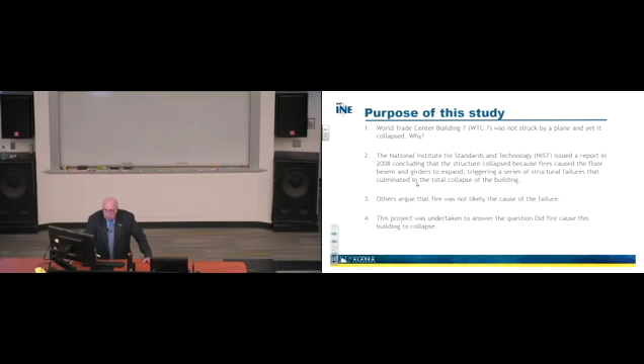More importantly, since this is a progress report, it's not a traditional slideshow with just bullet points. There's quite a bit of prose here, and the idea is that this will be made available for you to read additional information if you choose. We're going to be transparent. We welcome any questions, and we're making everything we've done available so that it's scientifically tested. We'll have a peer review committee to make sure we've met all those standards.

Today I want to share the methodology with us. We first assembled the available documents, construction drawings, etc. that were available for this project and building. Traditionally, I would have liked the opportunity to go in and pick up all the pieces of the puzzle and put it back together like a typical airplane, but they did not exist—it wasn't available.

So we've done the best we can with all the available documents. Basically, we created an AutoCAD drawing that we used to build a virtual geometry of this 47-story building. In digital form, you should be able to see every piece, every puzzle, every member, and it should look exactly like what was used in that structure. That's what we did.

We then prepared an Abaqus nonlinear computer model for the connections and framing of this building. That's a fairly sophisticated finite element program available that enables you to look in detail at how something responds under a set of conditions. I know I have a mixed audience here, so I'll try to keep it as simple as I can, while still sharing some pieces of complexity so those in the technical arena can appreciate that we looked at this in a fairly sophisticated way.

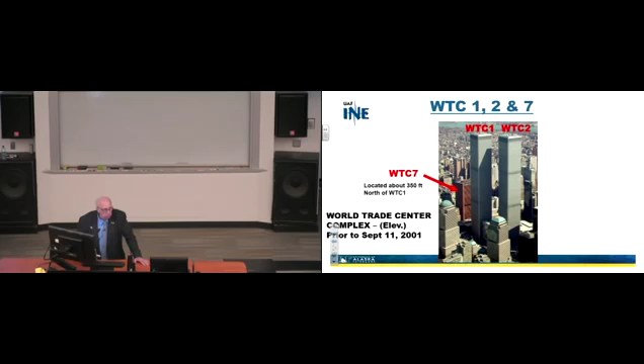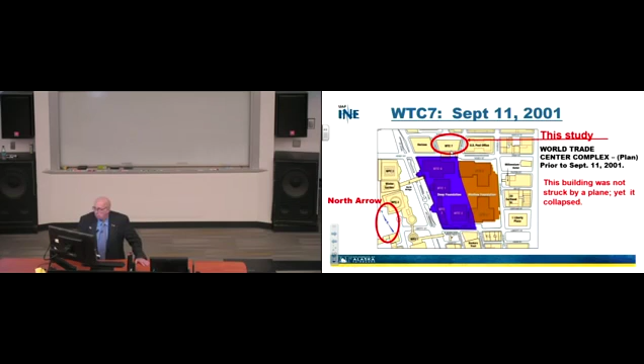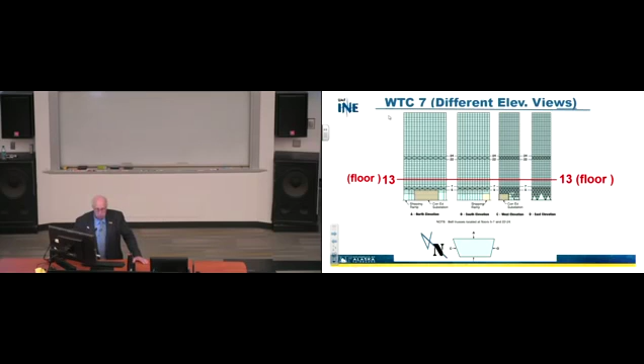So our life in plan view is going to be in that area, because column 79 - just to give you a snapshot of where we're heading - it basically is what they said failed to bring this building down. So we're going to go there and take a look at it, and we're going to look at it intensively.

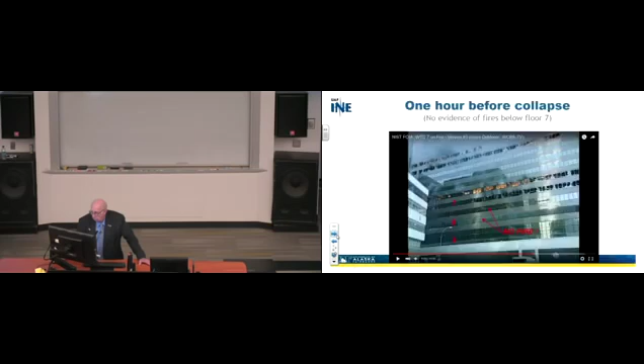The beams didn't get that hot. When we take a look at the beams, they reach 500 degrees C, and the column temperatures only reach 300 degrees C. Now that's significant, because there's a point in time where the steel begins to decrease in strength and modulus decreases when you reach a certain elevated temperature. So the first thing I would have thought about when I got involved here is, okay, the columns obviously got really, really hot, and they lost strength, and we would have ended up losing the building.

Nobody seems to think that ever happened. Furthermore, there weren't a lot of combustibles in there. So no east exterior wall deformation occurred due to expansion of beams. That's their assumption, in beams K3004, C3004, and so forth.

All right, so now moving on with that idea in mind. We've got all that beautiful thing captured in our minds. We're ready to go. So, there were no shear studs installed on the building girders.

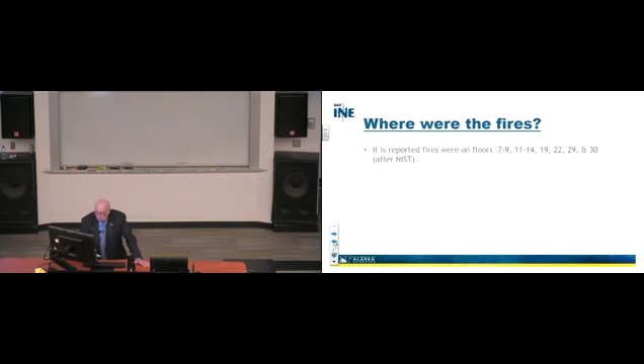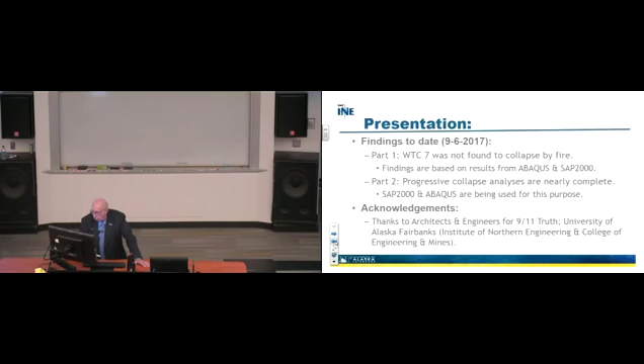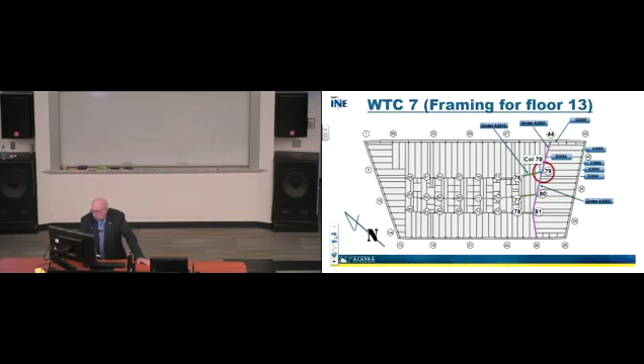Going backwards here or something. Hang on a second, I'm going crazy. Too much fun. All right.

So they've lost those supports. So that means those two columns no longer have lateral support at that level, and did they possibly have a problem later? The floor loading was 88 pounds per square foot. The NIST computer model results were based on exterior columns being fixed in every direction. That's kind of a significant thought.

All right, so now looking at their plans, this came out of the NIST report on page 343, 2008. And so this gives you a geometry of - that's a 44-foot length from 44 to 79. That's a girder length, 44 foot - that's longer than this, for sure. You see what I'm saying? That's not small. This is a huge building, 600 feet across. I mean, for God's sake.

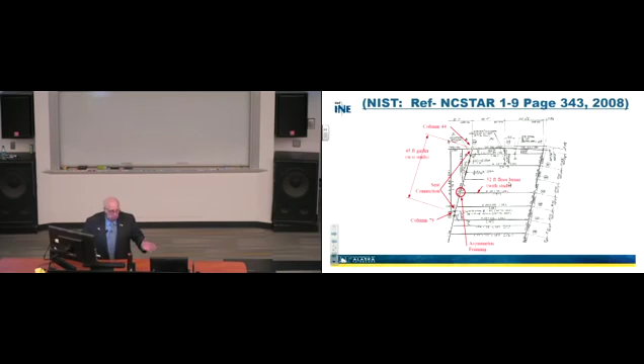So here is, 50-some feet here, 54 feet across. This is our exterior wall. I'm in the northeast corner of this building. Is that clear to everybody? Here we are in that trapezoid world. Notice that there's asymmetric framing. These beams, those beams, for God's sake, are 52 feet long. That's not small. I mean, where in the world do you see that kind of stuff?

So anyway, in their view, by taking a heat model, putting fire on it and then subjecting their finite element model to an increase in temperature, they got a thermal expansion. Their thermal expansion looks like this - so that actually is this girder right here, A2001. It expanded, and they said it pushed off of this seat, bearing seat, and thereby they lost support. And then these cascaded downward.

Okay, so that's basically what we're talking about here. There's that girder I'm talking about, there's that exterior, and here are lateral supports for this beam system through here. So what were their conclusions?

First of all, their fire-induced weakening of critical columns did not cause the WTC7 to collapse. Okay, didn't get hot enough. They're saying that 300 degrees is not hot enough. No argument. Temperature in column 79 was below 200 degrees C. I think that's true - I might have to look that up as a reference again, but I'm pretty sure that's about what it was.

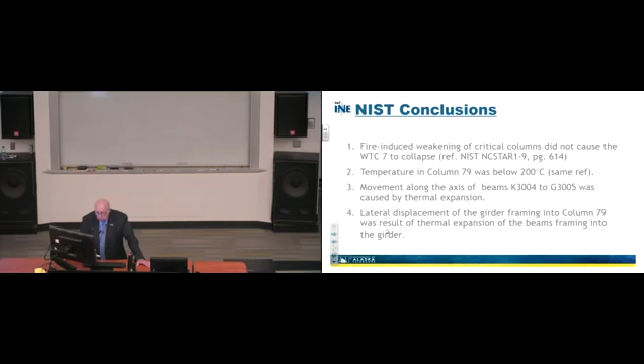Movement along the axes of beams K3004 to G3005 was caused by thermal expansion. Then the lateral displacement of the girder framing into column 79 was a result of thermal expansion of the beams framing into the girder. All we're saying here is when these heated up, they got longer. This was fixed, so they're all going to move to the left. That means they move what direction?

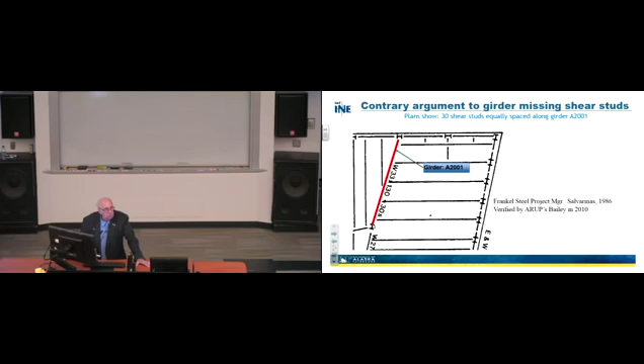West. And in moving so far west, what happens? Well, they're going to try to move, and is there enough space to hold them in place? That's what their argument is, right? That's key right there. And that's what it looked like - bang, bang, bang, bang, right? This thing bowed outward, and so this moved and that moved.

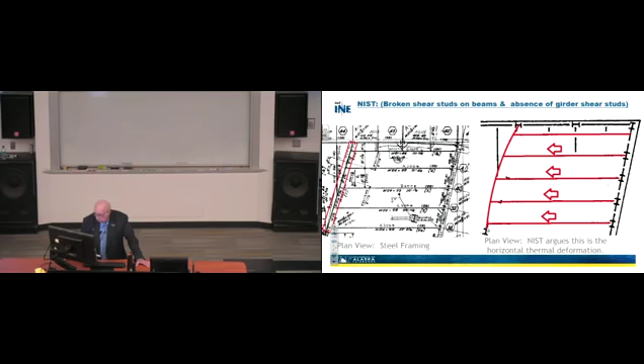Okay, this is the cascade issue that they said. The buckling initiated here at this place, at floor 9, and then all these issues meant that they lost lateral support of that column.

This is column 79, by the way, the one we've been focusing on. That column doesn't have any lateral support, and because of that length, it cannot take nearly as much load as it was designed for. Consequently, the vertical support and lateral restraint is in the north only, so therefore there's a huge problem.

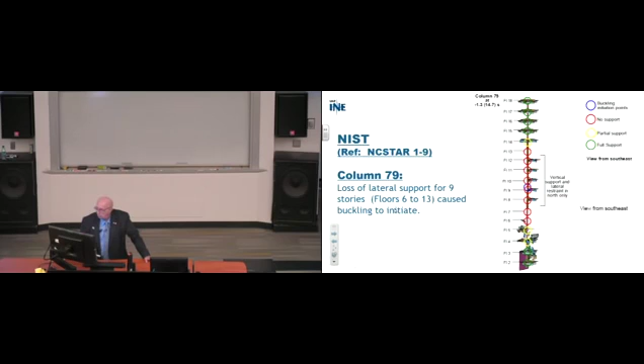So the loss of lateral support for 9 stories, floors 6 to 13, caused buckling to initiate, which means you lost it. Okay? Is that clear? Everybody clear about what I'm saying here?

Okay, now let's take a look at their model for a moment. This is looking at a partial of that trapezoid, down here, partial—we're seeing a partial of it. This is the northeast corner. There's column 79, and in that blue, it's kind of significant.

That blue is where they put, at every place a beam and a girder come together, a column to girder connection, a beam to all these kinds of things. There's a connection that's on the drawings that says here's how you will build it. You bolt it together, you make it do whatever you want it to do, and that's the way it was supposed to be built.

Remember, the north arrow is here, this is the west side, the east side is to my right. This is after NIST—the area of floor where connections were modeled on floors 8 to 14, that's in the blue area. Over here, that wasn't done. So there's column 79, here's the area outside of that, and now let's take a look.

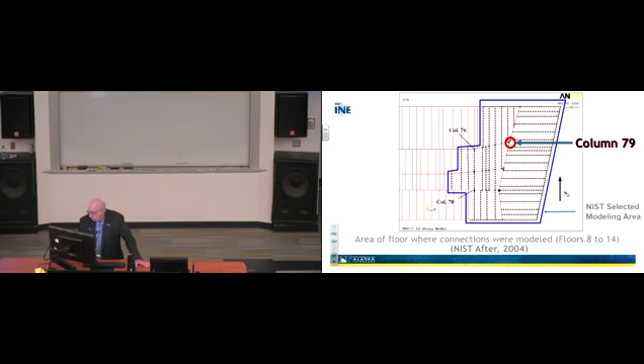Outside the selected area, connection failures were not modeled. NIST used fixed or pin connections. So automatically you have to ask yourself: do they have the same stiffness as what was modeled more accurately here?

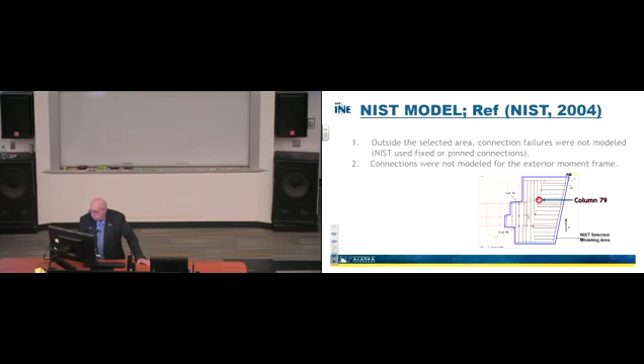The next corresponding question is, does it have an influence? Does it change how the system is going to respond? The connections were not modeled for the exterior frame, and the columns themselves were treated as fixed.

Also, in the NIST documentation, page 525, 2008, a girder was considered to have lost vertical support when its web was no longer supported by the bearing seat. That means if there's loss of bearing support on A2001 coming into column 79, then it's lost. The bearing seat at column 79 was 11 inches wide.

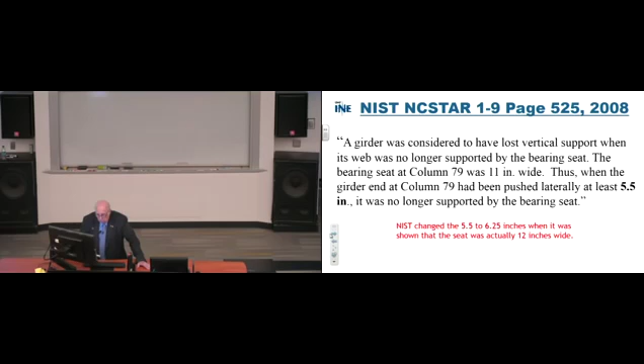Thus, when the girder end at column 79 had been pushed laterally at least 5.5 inches, the web was no longer supported by that bearing seat. NIST changed that 5.5 inches to 6.25 inches when it was shown that the seat was actually 12 inches wide. So that's something to think about—why did that happen? And that was later.

So some of the NIST results are the following. Pardon me if I'm boring you, but this is a passion for me. Let's just take a look at what actually happened.

Here's the NIST model. Remember those connections—so we're looking at this not from the south, we're looking from the north, right? Isn't that right, Zhili? Or am I looking from the south? Yeah, that's the north face of the building. Yeah, exactly, north face of the building.

So here's a penthouse up here, and you're going to see two different situations here because of the connections issue. Now let's see what this thing—and this is the real building—so here's their model. This is their progressive collapse, which I'm not going to show you ours yet. And here is this one, taking a look at the failure. Actually, that did occur that day.

So one has to ask themselves, is that the same thing? Is that the same building? So it looks like it behaves in an interesting sort of way.

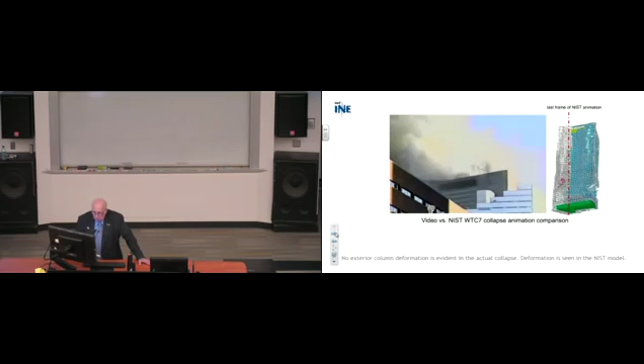Okay, so anyway, let's go on. Here's the NIST model that we were just looking at. And here's the other side, flipped, showing where that modeling was actually done. This is column 76, 78, and 79 is in here. So they were looking at this finite element progressive model that they were using to look at that.

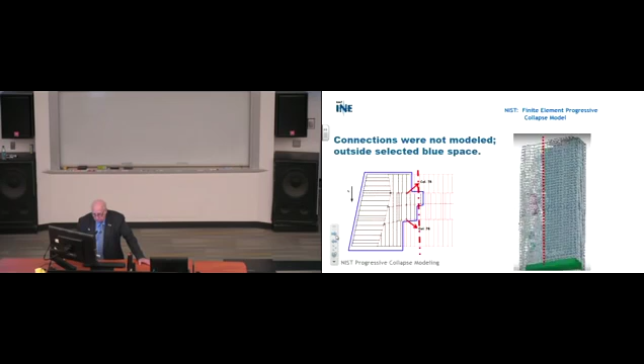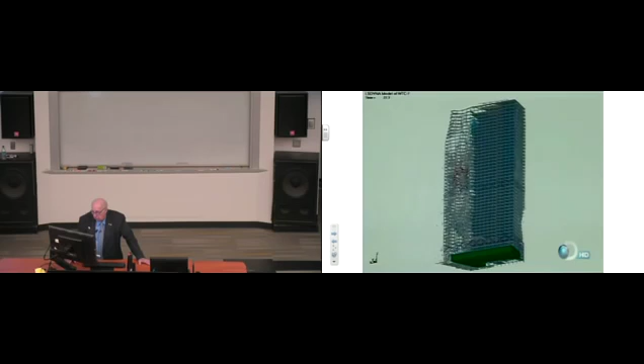Well, I suppose we could even look at it from a different perspective. And there it is again. This is what they're doing. You have to ask yourself the question though, why is it so much different on one side than the other? You see what I'm saying?

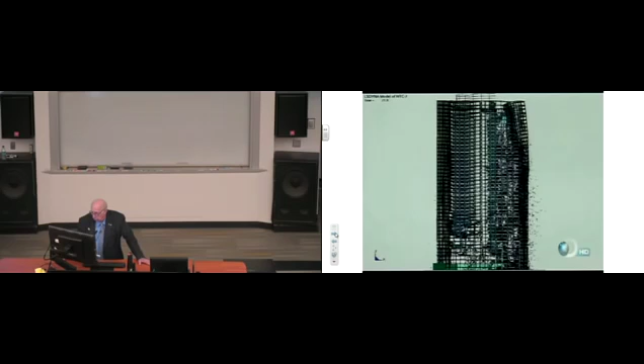And here's things that they, because of some damage that came in from the debris falling through the windows and stuff, they're accounting for some of that. Anyway, all right, so let's talk about UAF for a moment.

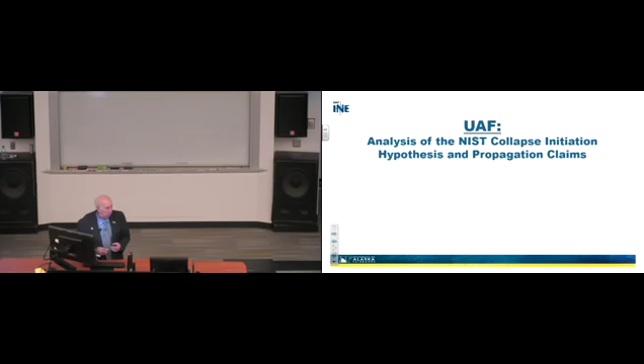Analysis of the NIST collapse initiation, hypothesis and propagation claims is really what we're about to embark upon, is how valid is some of this stuff from a science point of view. So UAF analysis of the NIST collapse initiation, hypothesis and propagation, we created a solid model, an Abaqus model, of the

structural members in the northeast corner of the 13th floor of WTC 7, and a finite element analysis was then performed to replicate the results claimed in the NIST WTC 7 report that girder A2001 was pushed or rocked off its seats at columns 44 and 79 to initiate the collapse of the building. So one might argue, if those things didn't happen, would the building have collapsed?

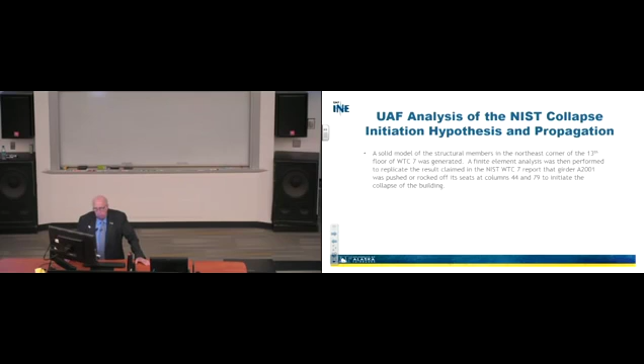So what we're going to do is create part of a finite element model, and we're going to be really conservative. We're going to force things to happen that's worse than the real world, okay? And in so doing, if we can't force failure, then it couldn't have happened. Are you with me on this point?

All right, so that being said, we're going to fix the ends. We're going to force movement through girder A2015 by heating it up. This over here is going to be heated up. These beams are going to get heated up, and they're going to be fixed in the other direction. So we're pushing it each direction, making matters really, really the worst possible.

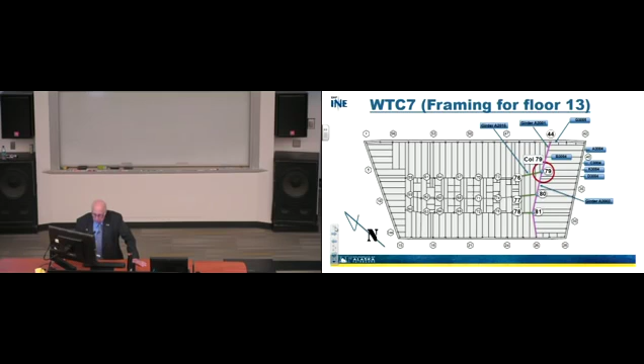It's a W14 by 730 standard structural shape. What that means is it's 14 inches deep, weighs 730 pounds per lineal foot. That's a chunk of change.

Now within that context though, what they did is they built side plates on it, and they closed that box. They closed it so it has structural integrity, resisting twist, significant. But those edges, those 2 inch by 26 inch buildups, mean there is a lip on each side of this, and they're going to literally put on that flange the bearing plate.

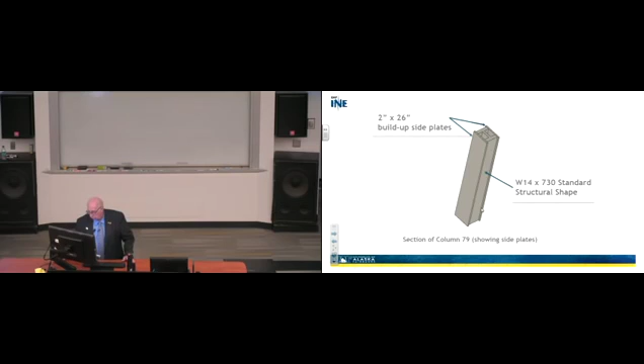Understand? So if this thing starts moving, and it's getting shoved, shoved to the west, which is to my left, probably your left too, then it can't get past that thing, unless something happens or breaks, right? Does that make sense?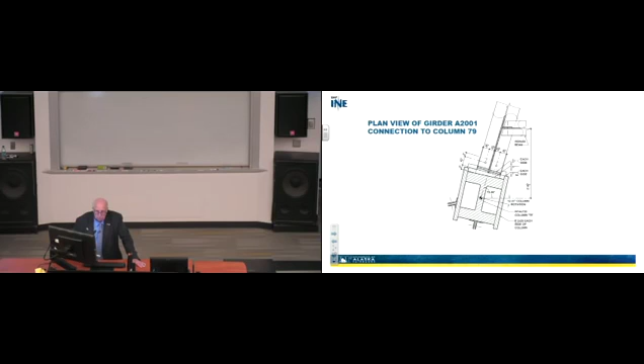And there it gets shoved. So the plan view of A2001 moving across its bearing seat at column 79 due to thermal expansion of the beams framing into the girder from the east is here, and it gets shoved. Note that picture illustrates that A2001 is trapped by that column side plate, and it's not possible for it to move the girder web beyond the seat claimed by NIST. They're saying it got shoved off and fell down.

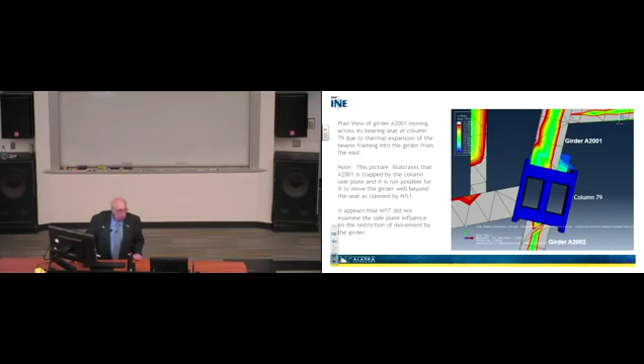The fact of the matter is they didn't have the side plates on it. They weren't there in their model. So they wouldn't have found that. But yet they did exist in the structure, in reality. It appears that NIST did not examine the side plate influence on the restriction of movement by that girder.

Okay, so now let's take a look at what else we looked at. And this is just part of the puzzle, because we've been playing this game for 2 years. So this is just a few weeks of stuff.

So the model shows the influence of the thermal expansion at the northeast corner of floor 13. Here we are. There's column 79, column 44, and there's the northeast corner. And here are the beams framing in to that girder system. So when girder A2001 is trapped behind the side plate on column 79, these beams begin to buckle.

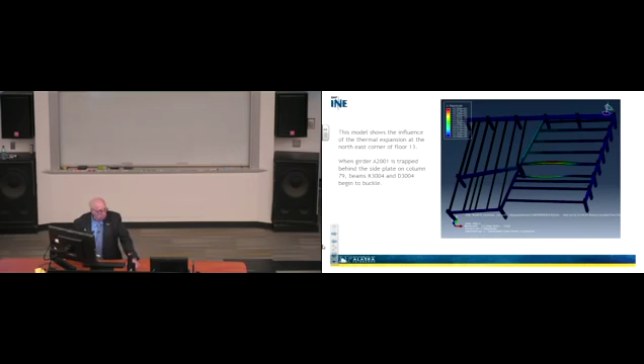In other words, they can't go in here. So it's heating up, it's pushing, and they can't stand the amount of load axially that's been imposed upon them. And so they begin to try to displace out of the way and relieve them their states of stress. Are you following what I'm saying here?

So fundamentally, that happens. This is out of the NIST WTC 7 report, figure 8-22, which is showing basically concrete slab, metal deck, all that kind of stuff. Exterior columns out here, and this is basically column 79, column 44, and how that column is, and the girder here, and so forth, okay?

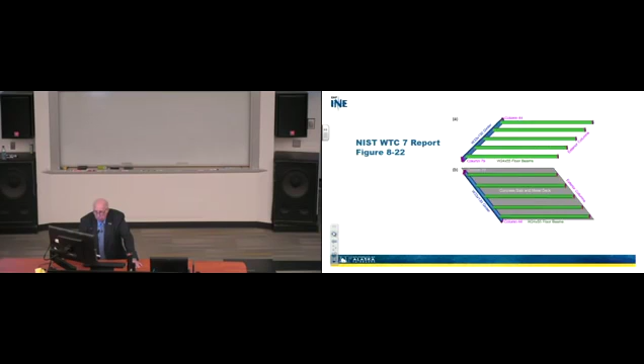And here's what begins to happen on the exterior columns according to their stuff, okay? And so they did not have those side plates in there.

So let's treat for a moment the lateral support beams, S3007, and so here we are in this area right here. See those little beams in here? They play a role, and that means that they provide lateral support for that beam. They provide lateral support for that beam, also for that exterior. So they're forcing them to act together, not as individually.

So if things actually got out of hand, you have a lot more capability from a lateral torsional buckling point of view or an axial load point of view. And so the lateral supports on us were left off in G3005, okay, of this beam. They were left off. Those were left off. Yet they're there.

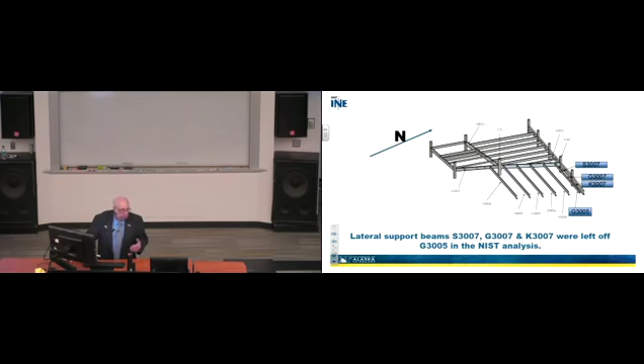So that means that something could happen, and there it is. So the UAF analysis showing beam G3005 does buckle when lateral support beams 3007 spanning to it from the north exterior wall are not installed. Okay? So if those are not installed, it's going to buckle.

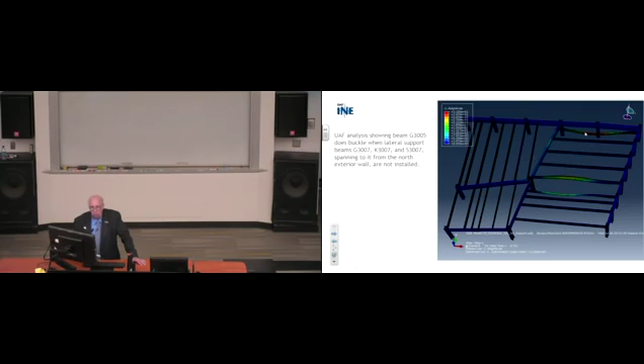So the UAF analysis also shows that that girder does not buckle when you have them in. There's a huge difference between those two thoughts and what that might mean to the behavior of this system, spanning to it from the north exterior wall as we see here, okay? So as everybody getting a mental picture of this building, you should be almost getting an intimate view of what we've been living with in this picture, okay?

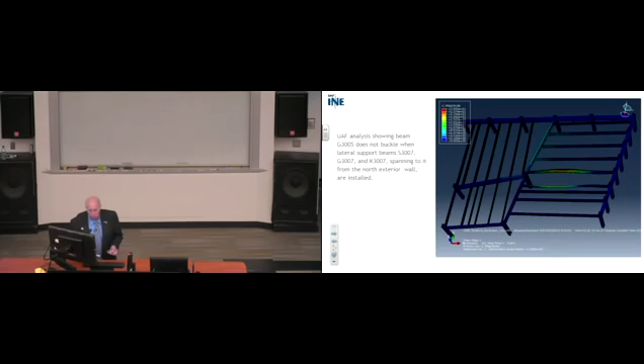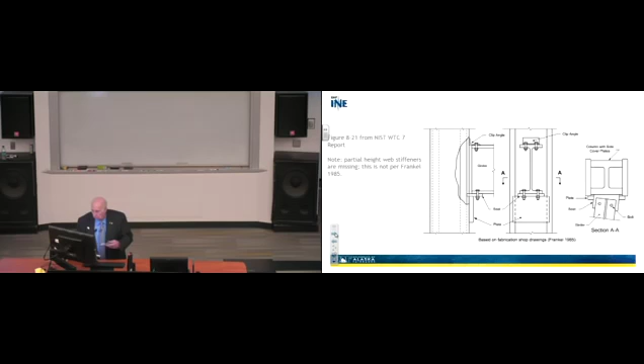If they're there. If they're there. But NIST did not include them. So partial height webs are missing. That means there's some issues here that we literally—it affects the behavior of this system.

So figure 8-23, finite element analysis from the NIST WTC 7 report, note partial web stiffeners are missing. So the behavior of this interaction between column 79, A2001, column 44, the beams to the girder, the moving of the girder on that bearing stiffener, I mean on the base plate.

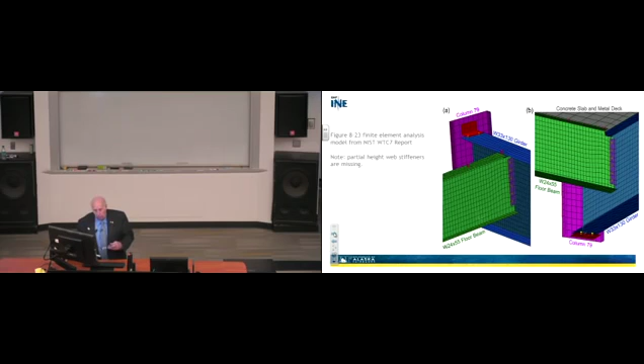Now remember, they didn't have the base. They didn't have the side plates. They didn't have the stiffeners, and all of those things are going to give you a huge added resistance to anything going on here. And in spite of that fact, I'm going to share with you some other things that make it quite interesting. So here we go.

What if you don't have any side plates? The analysis was performed forcing girder A2001 beyond its bearing seat by removing the column side plate, increasing the coefficient of thermal expansion of the beams framing into it by 40%, so we could get that kind of movement. That's not true, we did it just to see what could happen. Without the increase in the coefficient of thermal expansion, the web would not have moved sufficiently to get it off the bearing seat. We wanted to see if we could make it move. That's at column 79, that's A2001. Is that clear? Everybody got a mental picture of what's happening?

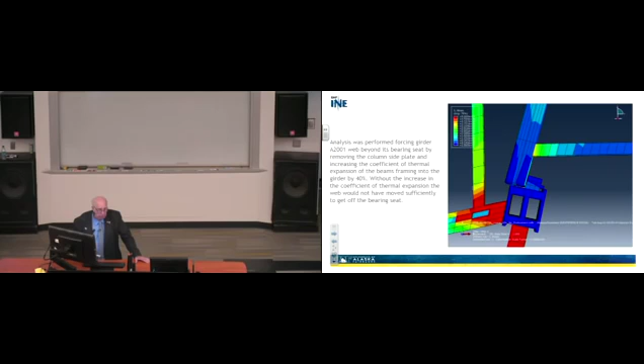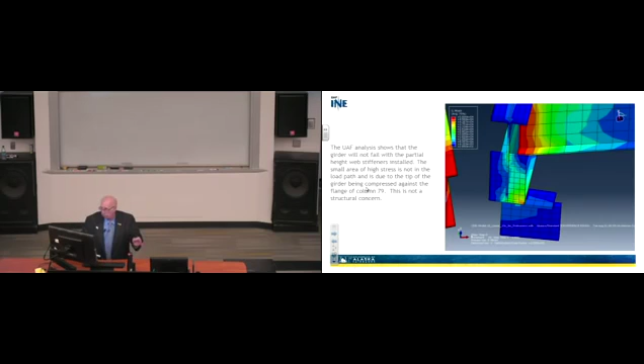Well, again, this is the UAF analysis. It shows that the girder will not fail with the partial height web stiffeners installed. That small area of high stress is not in the load path, right here, right there, is not in the load path. That's a point of high stress, by the way, but it's not in the load path, and it's due to the tip of the girder being compressed against the flange of column 79. This is not a structural concern. It's a fact that there was some overstress there, but it's not going to cause the building to come down.

So we also conducted a modal analysis showing the 52 Hz frequency mode of the falling beam and girder assembly, which was needed to calculate the combined stiffness of the contacting structural members and the subsequent impact load on the girder below on the 12th floor. So here we are on the 13th. It falls, drops off of that base plate, drops down, beams go, girders go, concrete goes, all that stuff happens. You're going to have stiffness involved, you're going to have F equals MA involved, you're going to have those conditions. And so we looked at that.

The NIST and ARUP claimed that the falling beam and girder assembly from floor 13 impacted and broke through floor 12 in an 8-floor cascade. So based on the natural frequency, the stiffness of the beams can be calculated and the amount of deflection and load can be examined. This establishes whether the phenomena could actually physically occur.

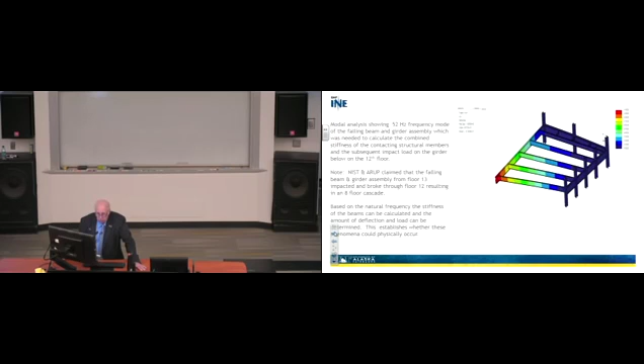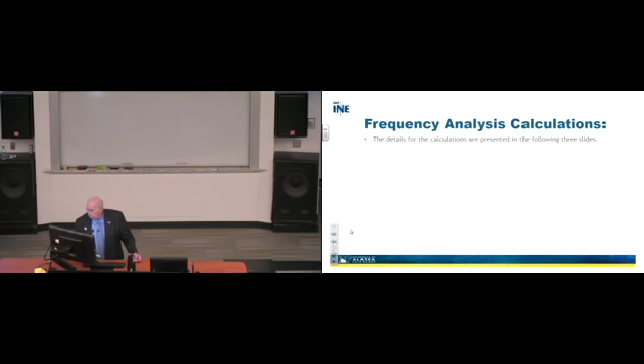I want to just share with you, I'm not going to spend any time on it, but those calculations are in the following pages, okay? So we did that to examine that issue, and that's where they are. You can go, at night while you're relaxing, you can read these. But I'm not going to read them for you.

So anyway, we had this 215,211 pound impact force, which is only 34% of the 632,000 force required, and thus insufficient to shear the girder bearing seat support welds, and the northeast corner floor 12 would not have collapsed if a girder at floor 13 came off its seat. That's basically what we're saying. Thus the ARUP analysis did not show a basis for propagation, even if the girder were to fall off its seat in column 79. These findings illustrate the ARUP's explanation is actually invalid.

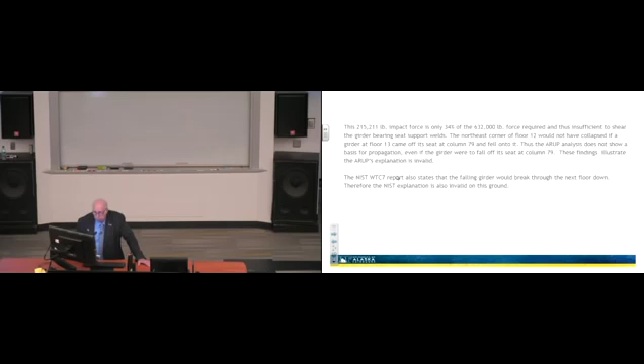There was a 5.5 inch movement at the girder bearing support column 79 according to the NIST. The issue that led to that 5.5 inch movement was non-composite main girders. Now what do I mean by that? So you have concrete floor slabs, and on those concrete floor slabs, you have to decide how you're going to build it. Are you going to build it with shear connectors to the flanges and make it act as a system, or are you going to leave them so that they can slide? So I looked at it both ways. I looked at it and said, okay, what if it slides? What if it's so lubricated between those flanges and that concrete, there's no resistance to movement?

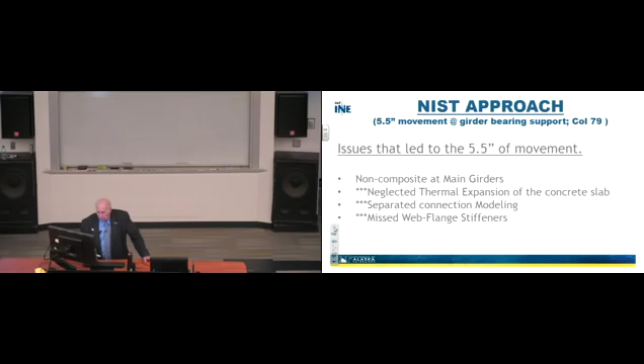What if there's friction between it? We looked at that. What if it's partially composite? What if it's totally composite? So all those, we neglected thermal expansion of the concrete slab, separated the connection modeling, missed web flange stiffeners were looked at. Okay, so all those issues were going on there.

So our approach was to take structural modeling and look at two programs, Abaqus and SAP2000. We established a quality control program with two researchers, Zilli and Fong, each doing the same thing much of the time and challenging each other with me there as a referee to make sure what we got out of it was right. If we didn't agree, we had dialogue and tried to find what was wrong, until scientifically we could justify every step of the way. It takes longer, but it's worth it to make sure you have good stuff.

So with Abaqus, we developed nonlinear springs for structural connections. What does that mean? If you have members bolted together and things move, and it moves fairly significantly, then it's probably not a linear curve. It's probably not a straight line. It's probably going to deform non-linearly, and it may never come back the way it used to be. So we looked at a nonlinear response.

We looked at composite, partial composite, and non-composite conditions. We looked at floors 12 and 13, and we looked at thermal expansion. In SAP2000, we looked at floors 12 and 13 again, and floors 3 to 47.

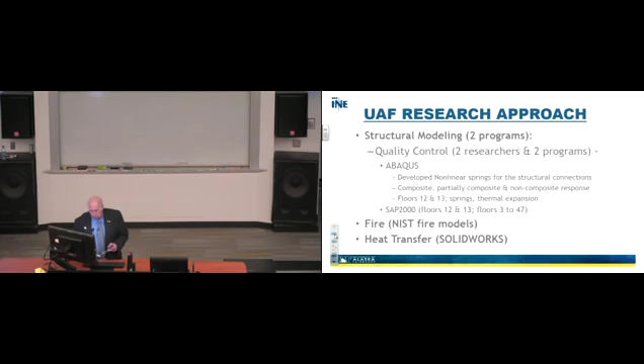Here's what we did do though. We used the NIST fire models to look at this, and then we looked at heat transfer using SolidWorks, and we also used Abaqus to do that. The steel framing, connection columns, beams and girders were considered throughout the entire floor, not just part of it, by the way, not just part of it, all of it.

Nonlinear springs on all stories is something we haven't finished yet, but we've looked at. Substructuring frames and concrete floor were used to minimize computer time.

It's my understanding that some of these computer models were taking up weeks to run. I went to a substructuring system where we could run them in less than an hour, maybe half an hour, maybe even less than that. I'm not sure. They ran really fast because I took out all the complexities and replaced them with equivalences. And then if we wanted to know what was going on within those equivalences, we put that stuff into those. So we could save huge amounts of computer time.

Heat transfer was studied and we looked at the floor tile over the concrete with welded wire fabric, stay-in-place forms, and flutes. These were stay-in-place forms, and there's a flute. What does that mean? It means there's a steel section - imagine if you take just a straight line and you drop it, like a little square hole, and it's long. And so that space is a place where they don't put any concrete. It's an open space. Saves concrete, you still get strength, and that's the flute.

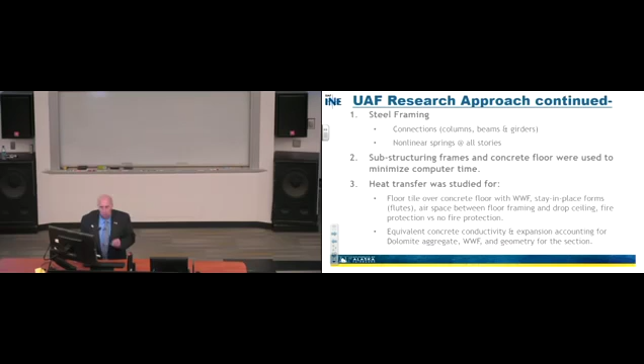We looked at equivalent concrete conductivity and expansion, accounting for dolomite aggregate, welded wire fabric, and the geometry of the section. What am I talking about there? Well, we went back to New York and asked what kind of aggregate they used when they built this. We tried to be sure we knew the aggregate, because it has a huge effect on the thermal conductivity and thermal expansion of the concrete. It's 75% of the product, so we needed to know what it was going to be. I had written a paper on this subject some years before and had a pretty good understanding of that.

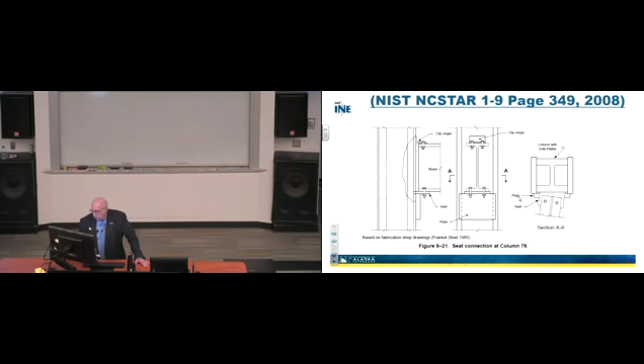So this again is the NIST seat connection at column 79 that they did, but they didn't consider those stiffeners. So here's the way we began to model the actual system, the way it went together. Here are those side plates - notice they're there. Here's the girder coming in, and there are the partial height stiffeners. They actually were there, and we began to model this from a computer program to digital, so we knew how this thing would behave when you put it together.

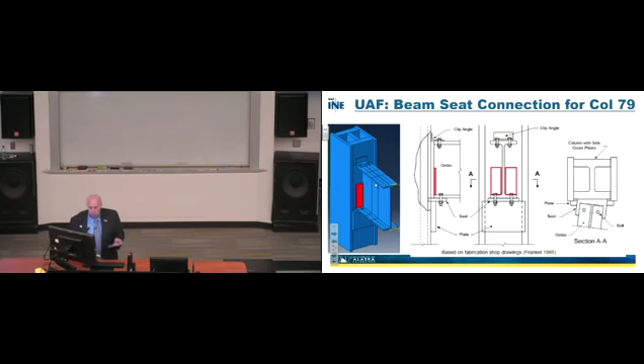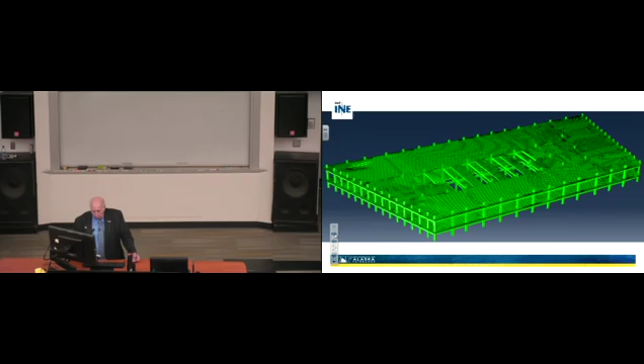Here's what that floor system actually looks like. By the way, these are elevator shafts. Over in here is column 79, and there's column 44. There's the exterior of that floor, and there's that whole system. That's an Abaqus model we're looking at.

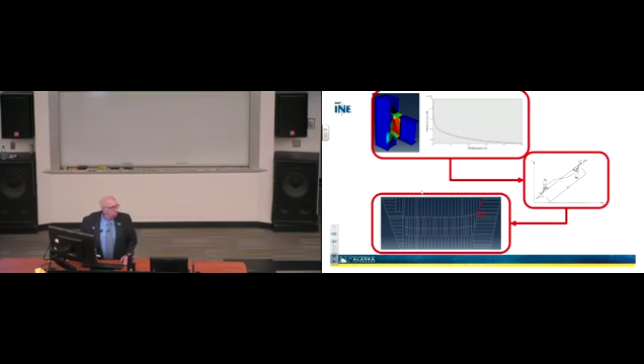UAF sample connection response. Basically, I'm taking every one of these connectors now. We identified this and called it an STC. That's our name, STC, and what does it look like? It looks like this, that's the connection type. We plotted the shear load versus displacement on it, so we can go in and put that spring wherever that's at, and get a response equivalent to if we had used all that complication anyway. So we threw it away and replaced it with an equivalent to save time.

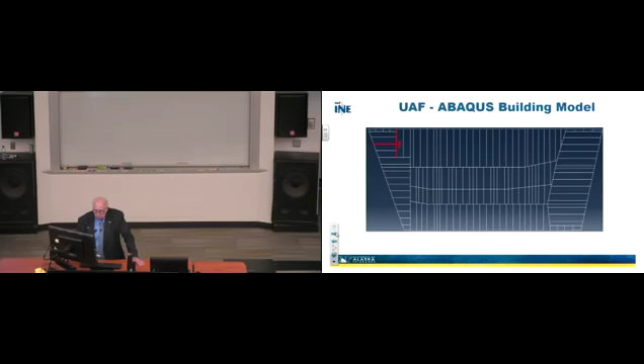Then we looked at the fin connection, same idea. I won't waste your time. That's how it was put together, and there's how it's actually put together mathematically. That's what it starts looking like as a behavioral system. We plotted a curve for it and got a spring system out of it. Same idea, and so forth. So there's what it begins to look like. Basically, we put a load, plot its behavior, and from that we put the equivalent into the model.

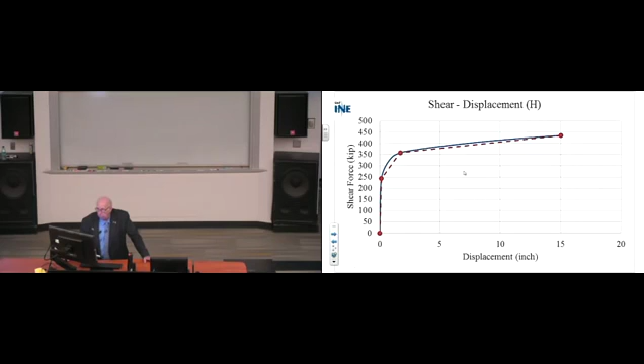So this is a SAP model of floors 3 to 47 from SAP 2000, and that's what we're using to look at progressive collapse.

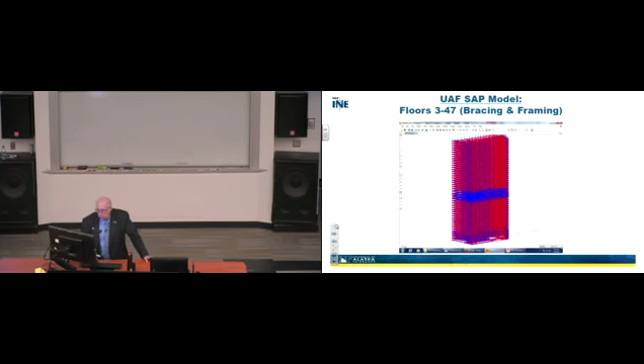So let's take a quick look at the materials that went into this thing. I won't bore you too much, just a little bit.

The material properties: steel ASTM A572 with a yield of 50,000 psi. Thermal conductivity of the steel was 35 BTUs per hour per degree Fahrenheit. Here's the thermal strain value. Density was about 490 pounds per cubic foot. We also had some ASTM A36 steels in here, I'm just not showing you all of it. Concrete's 28-day compressive strength was 3,500 psi, density about 145 pounds per cubic foot, with dolomite aggregate. We got a thermal conductivity from it, an equivalent conductivity we're using here, and thermal expansion.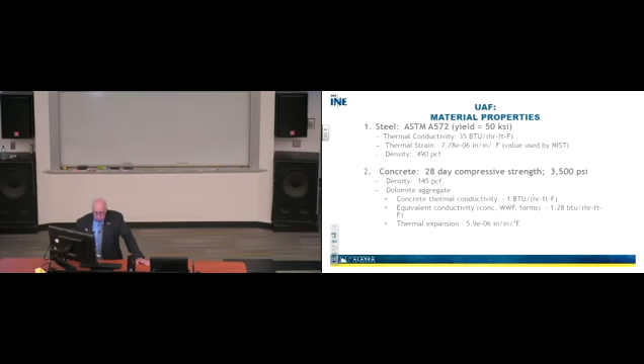So that's the kind of stuff that made up the model to simulate what we thought the building was. We fixed the exterior column wall line here, as did NIST, and subjected it to that heat-up model, and got a similar result. Well, we didn't actually—I'm sorry, I apologize, this is not the NIST model. This is our model. Here we have the connections as they truly are, all along this system, throughout the entire floor system, how it actually was built.

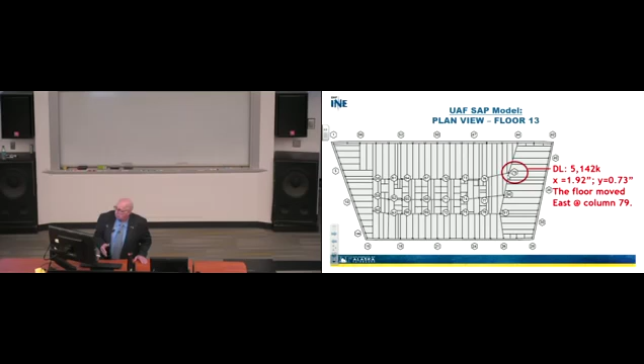Then we heat it up. By heating it up, we have a dead load here of about 5,142 kips. We have a movement of that section of almost 2 inches, but not west—it went east. Totally different: the floor moved east at column 79, not west. And by the way, they moved together, they didn't move separately.

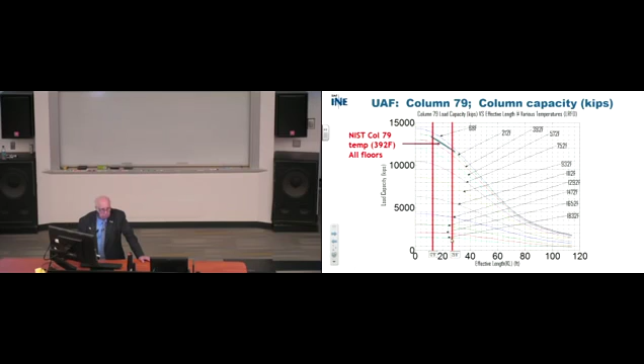So here's the material response versus temperature. Here's the column 79 capacity curve as a function of temperature. You can see even if you drop down into here, you don't get much change—column 79 at 392 degrees Fahrenheit. This is load capacity versus effective length for various temperatures. At 1832 degrees Fahrenheit, you can see it makes a huge difference in the capacity of that thing.

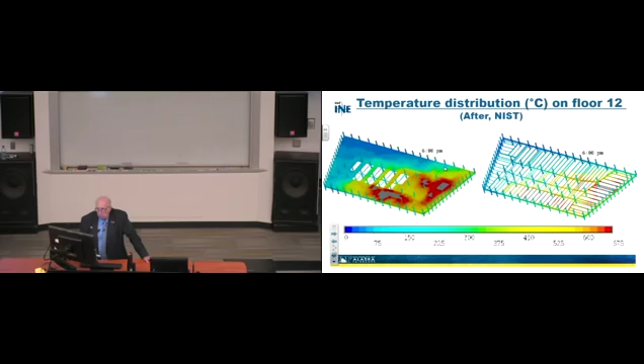So let's talk about the fires we actually put in this building, and here's what they were on floor 12. There's that whole area at 6 p.m., and then there's the fire. That came from the NIST models, and we used them at this point. Same here on column 79, floor 12 and 13. UAF Abaqus structural expansive movements—just wanted to share this with you. This is the model we're talking about, this is floor 13.

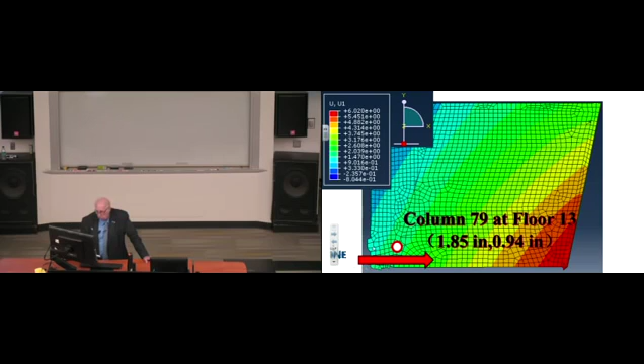This is column 79 at floor 13, 1.85 inches to the right. That means east, not west. So this whole thing moved. I'll show you a different picture here in a moment. So this is all this stuff to the east of this.

You can begin to see the displacements if you start looking at minus 0.50. Where's the zero at? It's over here somewhere. So here's column 79, moving with respect to this area. It's not moving with respect to this, it's not moving with respect to that. It's moving this way and that way with respect to what we call the thermal centroid, which is your stiffer point. So basically you've got a center of stiffness by which this thing is behaving, and that's what's happening here.

Notice that our results in the SAP model, column 79, shows 1.92 inches to the right. Abaqus, this is SAP, 1.85 in Abaqus. We did it two different ways and got very close to the same answers. And then NIST is 5.5 inches to the left, revised to 6.2 inches. And why? Because of some of the things I was telling you, in my view.

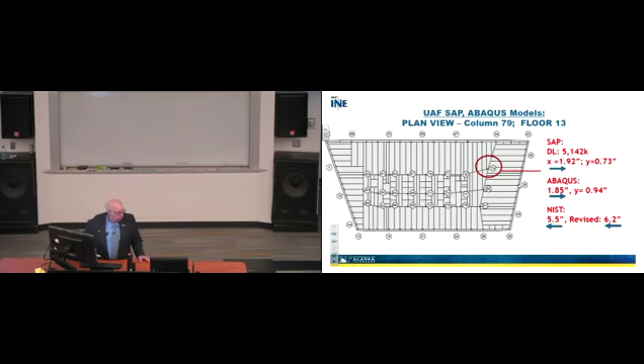So let's do a little comparative game. Floor framing, steel connections: UAF accounted for them, NIST partially. We have exterior steel framing connections that included springs, they did not. I'm talking about the exterior walls, they had them fixed, remember? Floor is composite with beams and girders, girder to column stiffener plates at column 79.

What about the floor composite with beams and not girders? Both of us considered that. Composite with beams and girders, yes, but they did not.

Thermal expansion of concrete deck, yes, but they did not. Thermal conductivity and expansion of material properties - so what I did is I went back and got the aggregate, then I changed it to make sure that we knew what the thermal conductivity of the concrete would be and the thermal expansion of that material if they actually made the concrete, matched to the aggregate type. And so we accounted for that, they did not.

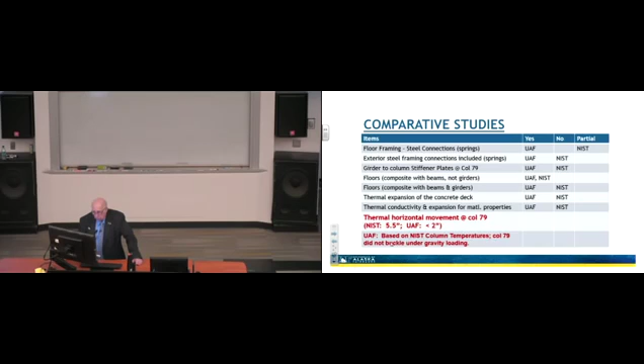Thermal horizontal movement at column 79 was less than 2 inches. Therefore, based on our analysis, column 79 temperatures were such that it did not buckle under any gravity loading - it couldn't have happened. So did Building 7 collapse from fires? No. This is based on our calcs. This contradicts the findings by the National Institute of Standards and Technology, the NIST approach.

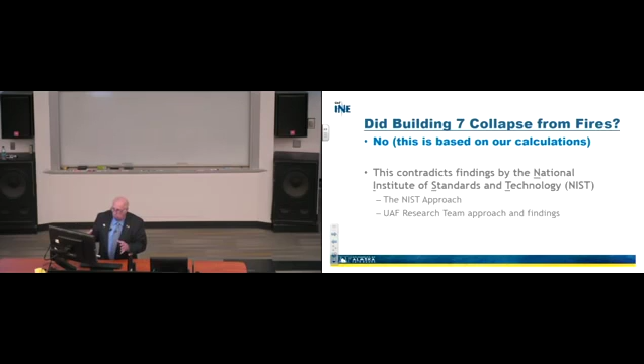So that was what I view to be the real way it actually behaved, not what you assume, not what you do in terms of boundary conditions, making things perhaps easier for yourself or whatever.

So the concrete floor diaphragm stiffness is significant, even with no shear connectors. Frictional resistance to thermal expansion is not trivial. We noticed that if you take those shear connectors out, they argue that they're not there - take them out, I don't care. When they go away, I have enough friction and enough shear connectors on the beams that it doesn't matter, it's not gonna make a difference. So that's what we determined, and we looked at it both ways.

The thermal expansion of the concrete deck cannot be ignored, and it's likely less than the steel. The value is highly dependent on the type of aggregate. My research shows that you can have thermal expansion of concrete as low as 2 times all the way to 12, whereas steel is about 6.5, depending on the aggregate. We used dolomite aggregate, and so we matched to whatever we had there.

The research team evaluated fire by considering airspace below the beams, in the space between the drop ceiling and the structural steel framing. We did that because a number of people felt like it was important. The result is that the fire underneath will likely burn through the drop ceiling quickly, and its resistance to heat transfer is likely not available to help.

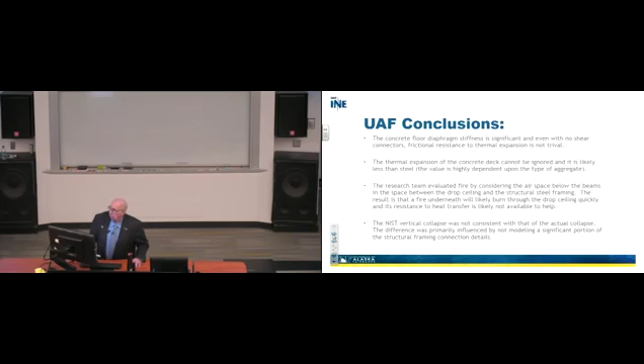So the NIST vertical collapse was not consistent with the actual. The difference was primarily influenced by not modeling a significant portion of the structural framing connection details. There may be other issues, but certainly that had an effect. There's no doubt about that.

What's new? What's next? Well, we welcome your input. We welcome input from the world. We would want to be able to try to make sure that our findings are based on scientific fact, and if there's a question, we're there to try to answer that and to make sure that our results are true and of value.

We're providing the study to be peer reviewed.

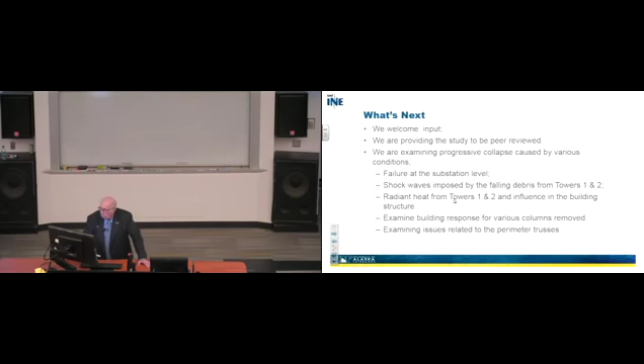We are examining progressive collapse caused by various conditions, such as failure at the substation level, shock waves imposed by the falling debris from towers 1 and 2, and the radiant heat that was imposed on the building structure by towers 1 and 2 when they heated up under the planes.

I'm interested in examining the building response for various columns being removed. We've already removed the inner core—I'm not sharing that with you, but it's very impressive what's going on. So then the question is, what else is going on?

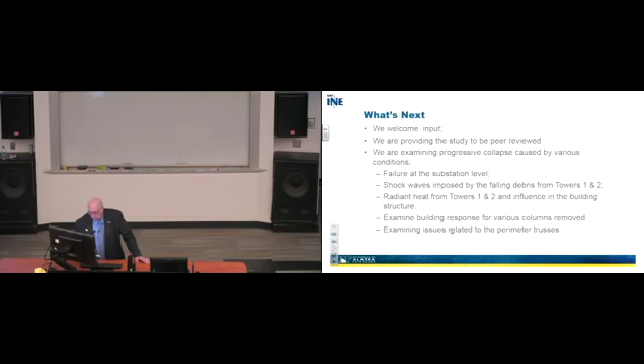And we're examining issues related to the perimeter trusses. There's been a lot of questions about what if they had a problem—what would that mean to this structure?

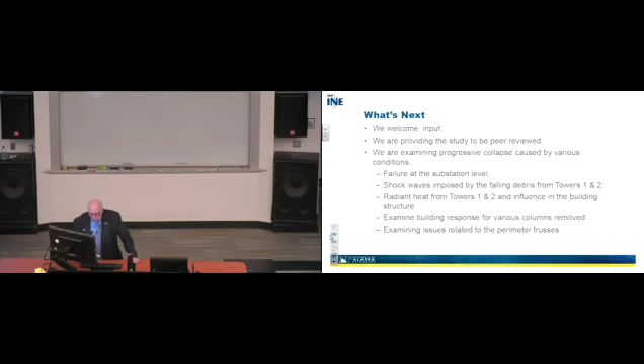I think, folks, that I'm done. Thank you.

We'll take some questions.

Yes, please. You mentioned that NIST didn't model, for instance, the partial stiffeners and some of the shear connectors. Was there reasoning—did they not find that in the wreckage and not think it was actually on the building, or did they do that to make it easier to do the modeling?

I don't know the answer to that. I think it was an oversight. I don't know how they got to that level, but I think it was an oversight. We're not here to criticize, we're simply here to make sure that we did it the way the building was built, and try to answer that question as best we can.

Yeah. For the people online, I should probably give you the microphone.

Yeah, I guess I'm still a little bit unsure. When you said NIST revised their figure, they added an additional 3/4 of an inch or so of expansion. Maybe I missed it, but what exactly did they cite for revising that figure? What was the variable they introduced that said, hey, we were wrong, there was an extra 3/4 of expansion? I'm not sure I know the answer to that either.